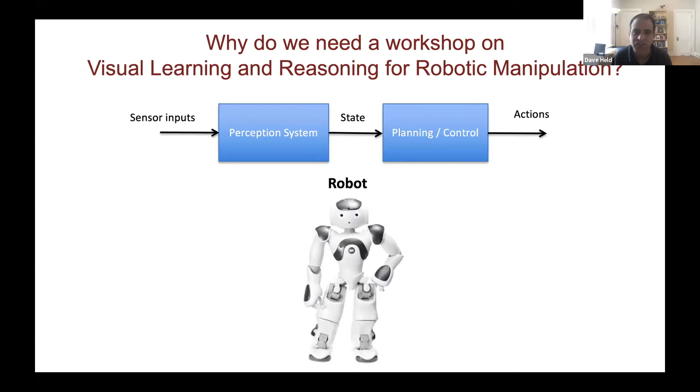Typically the people who work on the perception system are known as vision researchers, and the people who work on the planning and control system are called robotics researchers. And these groups of researchers don't always talk to each other, unfortunately.

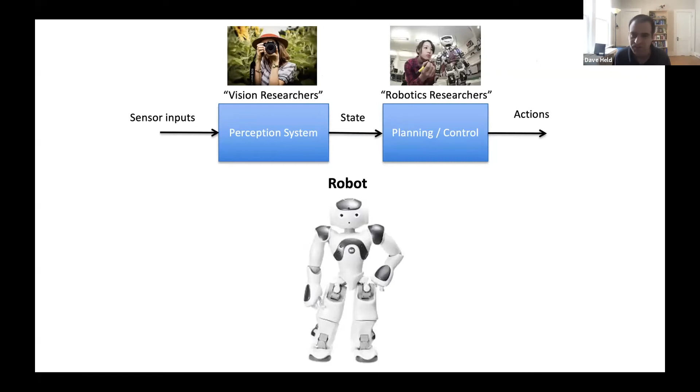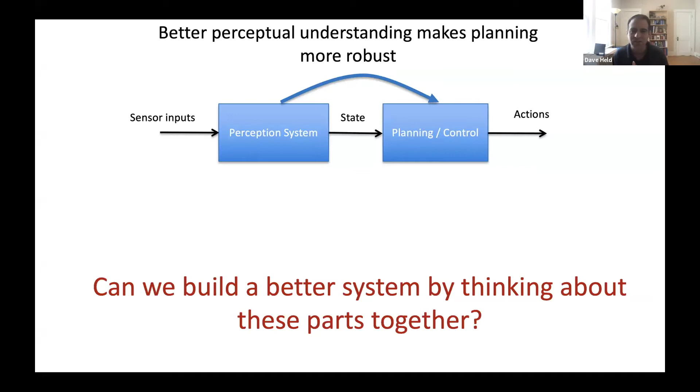But this workshop is asking the question: can we build a better robotic system by thinking about these parts together? For example, the perception system can be designed in a way that makes the planning and control system more robust. And alternatively, the robot's interaction with the world can be used to help build better perception systems.

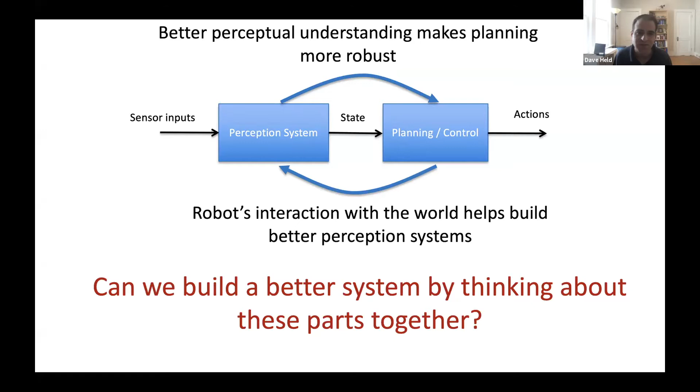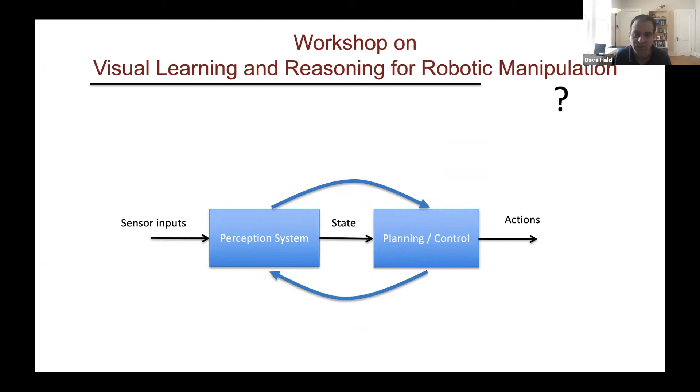So that explains why we need a workshop on visual learning and reasoning for robotics. But the other part of the question is, why do we need a workshop on visual learning and reasoning for robotic manipulation specifically? To motivate why we choose to focus on manipulation, let's look at some recent results in the area of robot learning.

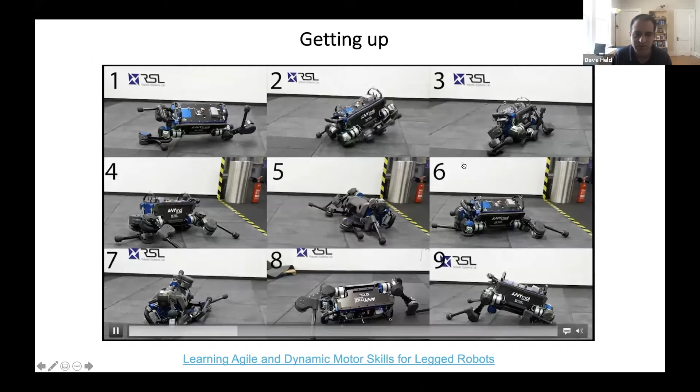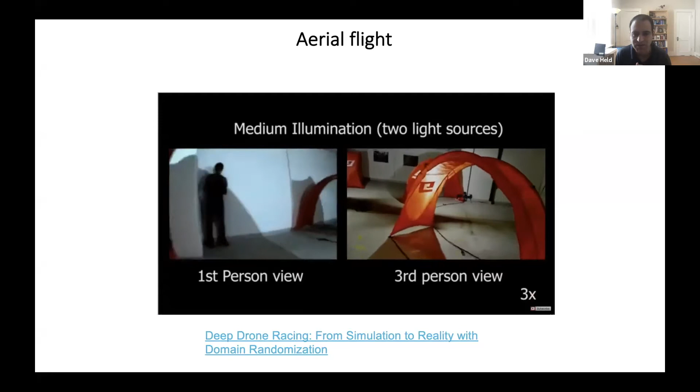There's also some recent work on teaching a quadruped robot how to get up from varying lying down positions. There's work on aerial flight that's teaching robots how to navigate around indoor spaces in varying lighting conditions. And there's also been a lot of work on autonomous driving recently through various companies.

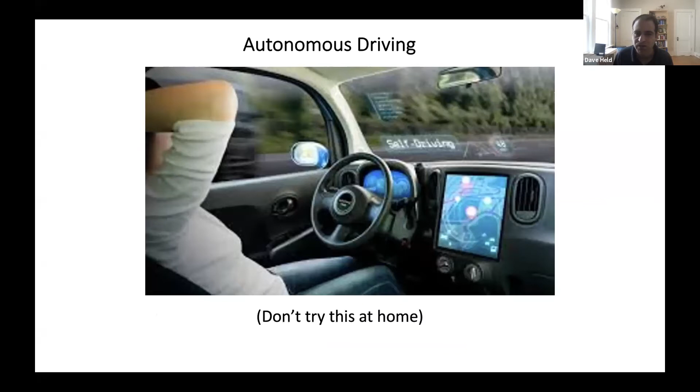One thing that we noticed throughout these works is that the main objective is basically to avoid collisions, to avoid contact with the environment. Whereas in manipulation, the robot needs to make contact with the environment.

It needs to perceive the diversity of objects that it might find in varying environments for manipulation tasks. And it needs to figure out how to interact with these objects.

So there are many tasks that a robot currently cannot do. Here I'm listing just a sample of them: cooking, laundry, cleaning, fixing things, or building things, opening. But there are many other tasks. And these are the types of tasks that fall into the domain of manipulation.

So maybe if we develop better manipulation methods and better perception, better integration of perception and manipulation, we can teach robots how to accomplish these tasks.

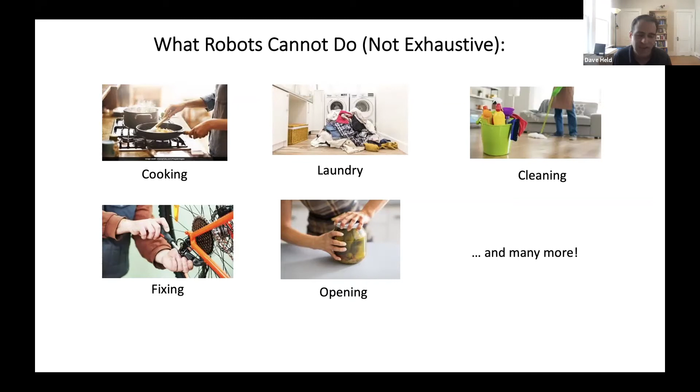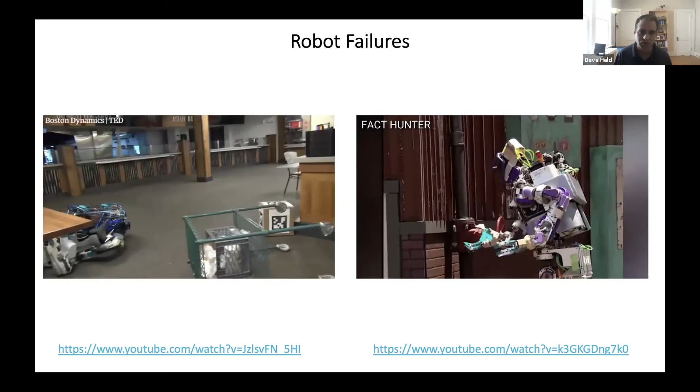And so the question I'm sure is on all of your minds right now is: why didn't Mask R-CNN fix this? I'm just kidding. I think it's actually fairly clear that just plugging in Mask R-CNN into this robot pipeline is not sufficient to make the robot actually function properly.

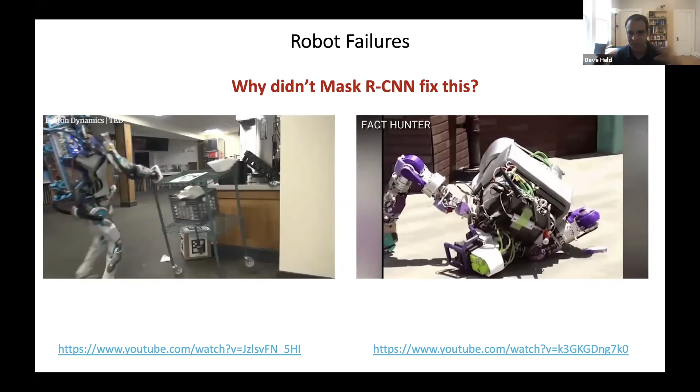We need to think more about what are the questions that robots need computer vision systems to answer, and how do we design computer vision systems to help robots do those tasks, rather than treating computer vision in isolation.

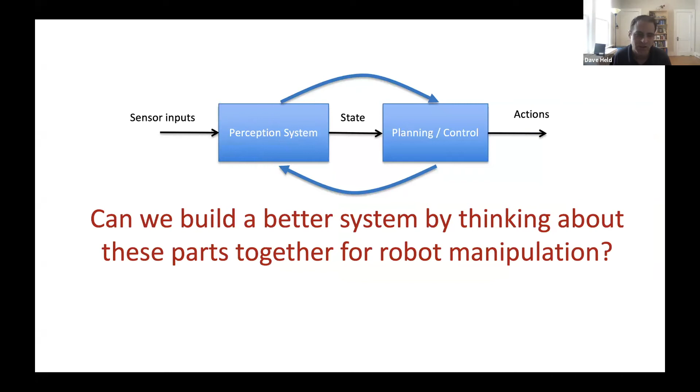This workshop is about thinking about how we can build a better system by considering the perception and the planning and control parts together for robot manipulation. That brings us to the workshop today on visual learning and reasoning for robotic manipulation.